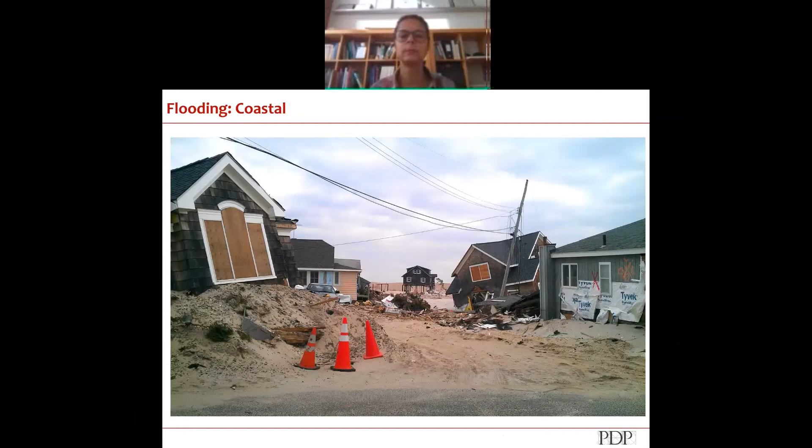There's also the possibility of what's called ice jams, which is when ice will block, for example, underneath a bridge opening, and then it would back up the water behind it. That's referred to as an ice jam. Riverine flooding is when a river floods. This is actually near my office. And if you look at the deck, this was August.

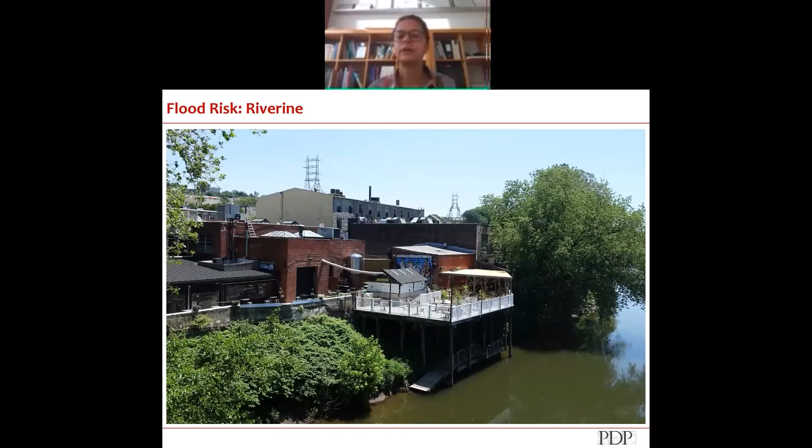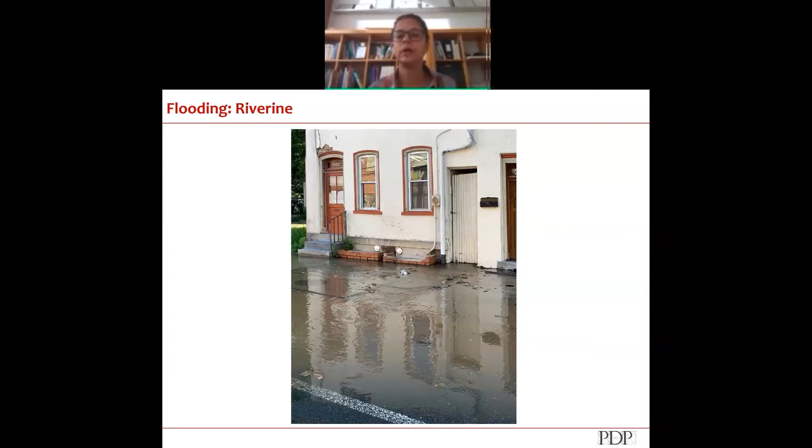So riverine flooding is when the river water rises and impacts historic buildings. You can also just get rain on a body of water, such as a lake, and the lake rises, affecting the properties around it. So the National Flood Insurance Program, which was founded in 1968, makes flood insurance available to both residential and commercial property owners. And it's insurance for both the property itself as well as its contents.

So if a property is in a higher risk area, the cost of that flood insurance is going to be higher than if it's in a lower risk zone. One of the things about the National Flood Insurance Program, which makes it a topic of discussion for a lot of people, is if you are purchasing a home with an federally backed mortgage, you are required to have flood insurance.

So the cost of that flood insurance is something that people have to add into their effective cost of owning a home. So people are incentivized to reduce that cost, obviously, as an expenditure. And the National Flood Insurance Program, which offers the flood insurance, wants to minimize its risk so that it's not paying out money.

And part of that is because by act of Congress, the National Flood Insurance Program must be financially self-sustaining. So what that means is they are supposed to be taking in as much money in premiums as they are paying out. So one of the essential problems with that is if you look back to events like Katrina and Harvey and Sandy and keep naming all of these storms, the National Flood Insurance Program is paying out a lot more money than it has been getting in historically. So they are currently raising their rates dramatically, which is having a big impact on homeowners.

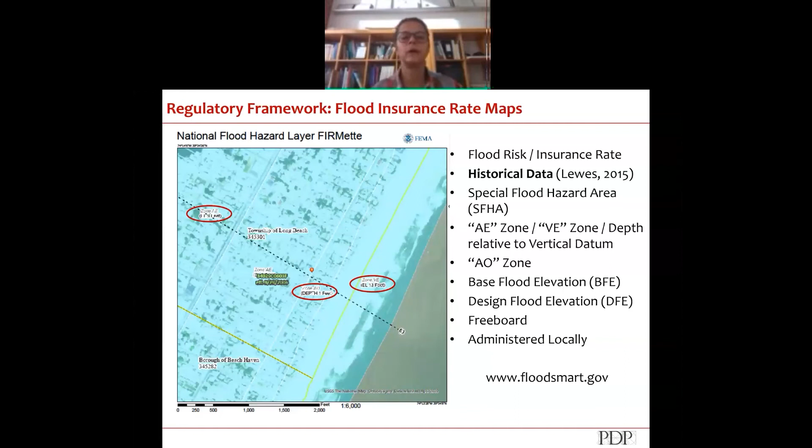So why does it matter? People's flood insurance rates are going up so that the National Flood Insurance Program can be self-sustainable. So individual property owners are looking at their rates go up and making choices about how to change their properties to try and reduce those rates.

For historic properties, or people who are concerned about historic preservation, it also matters because there are going to be changes to some of the buildings and places we care about. So one of the ways that you can quickly check your particular property's vulnerability is, I just noticed this, I think this went live November 1st.

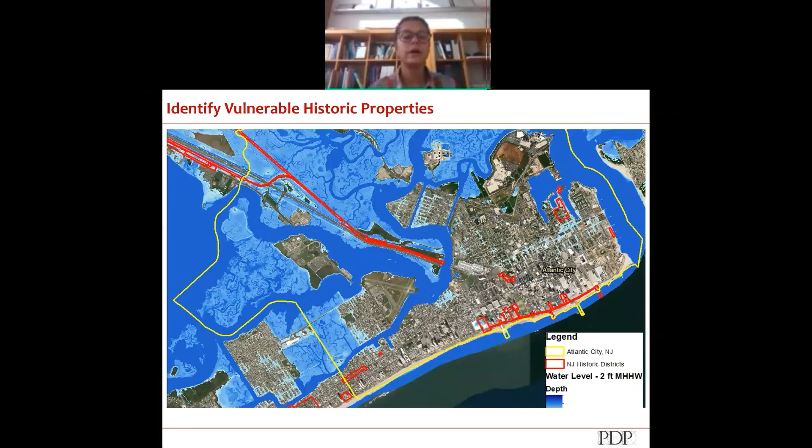If your community doesn't have it and you want to investigate on your own, New Jersey Flood Mapper is a fantastic tool that actually allows you to look at all areas of the state in New Jersey and map it for potential flood risk. You can also include sea level rise, so what the anticipated increased height of the sea will be and the impact on the landmass. So this example actually has 2 feet of sea level rise.

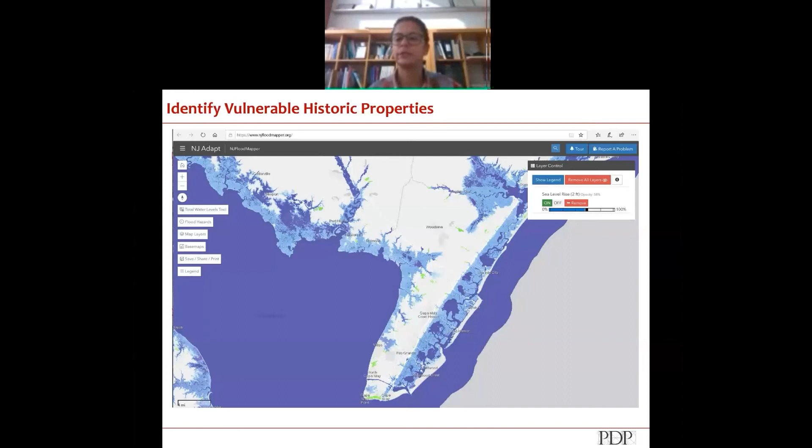And I picked 2 feet because there's a 17% likelihood that by 2050, the sea level in New Jersey will rise by 2 feet. It is 50% by 2070. So that's 50 years away. And you can also drill down into individual properties and use the same information. This is an example from Cape May.

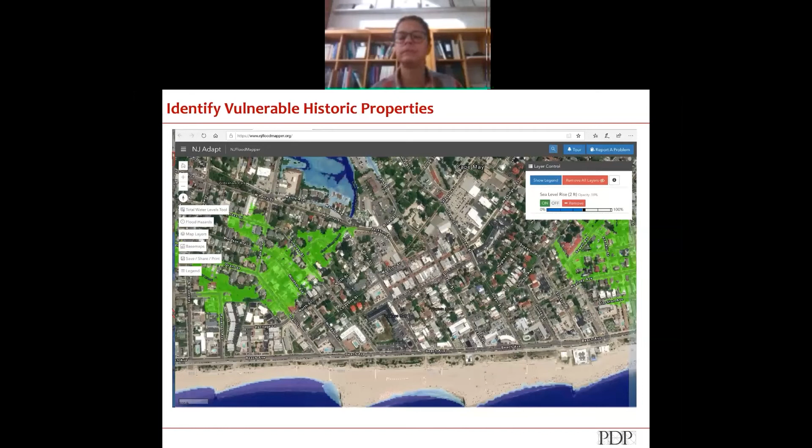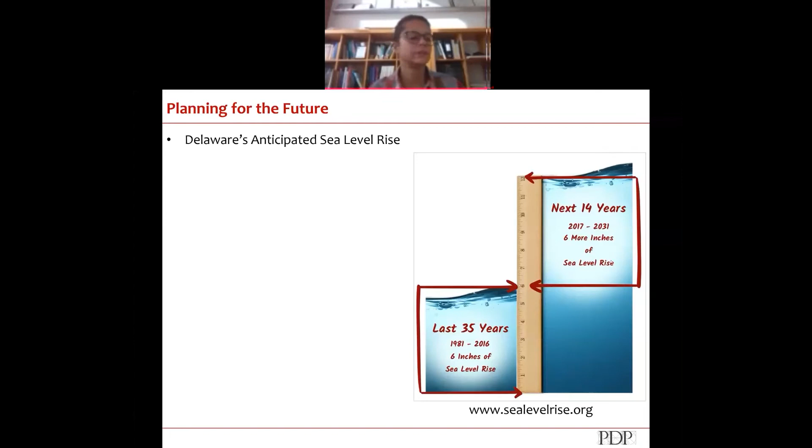So how do you know your own flood risk? Obviously, the property at the top of the hill has less flood risk than the property at the bottom of the hill. There are lots of ways to mitigate the flood risk of all of the properties, but we have to figure out which is the one that is historically most acceptable to us.

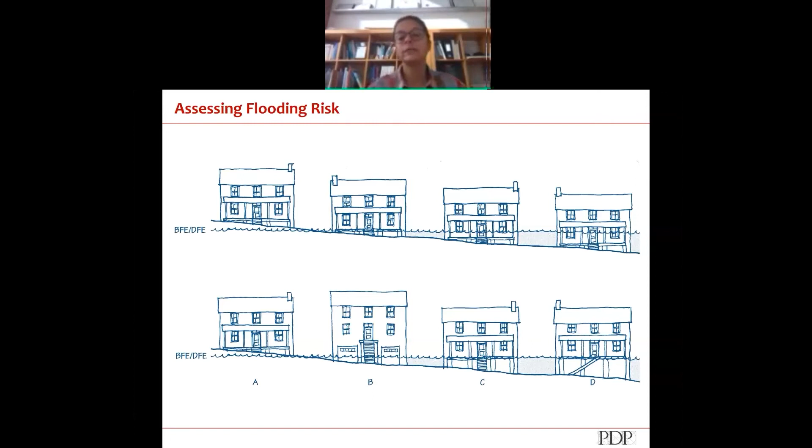So option B, which includes raising the house very high and including garages at the first floor and eliminating porches, is probably going to be the least acceptable option for preservationists. But whereas option C might be okay, option D, where you're really starting to get higher than you would like, but understanding that's where the threat is, is it still okay? That's something to think about.

So in looking at residential mitigation options, there are a few different kinds of things you can do. I'm going to focus on some of the basic things that every property owner can do, and then we'll get into some of the more complicated things which take architectural engineering services to make them happen.

So one of the basic things everyone can do is some improvements to their own landscape. And the central goal of landscape improvements is really retaining all the water that falls on your site. So think about having zero runoff to anywhere else. So everything that falls on your roof, on your driveways, parking areas, walkways, etc., all gets permeated back on your own site. This actually sounds a lot like LEED design, energy efficient, green design processes.

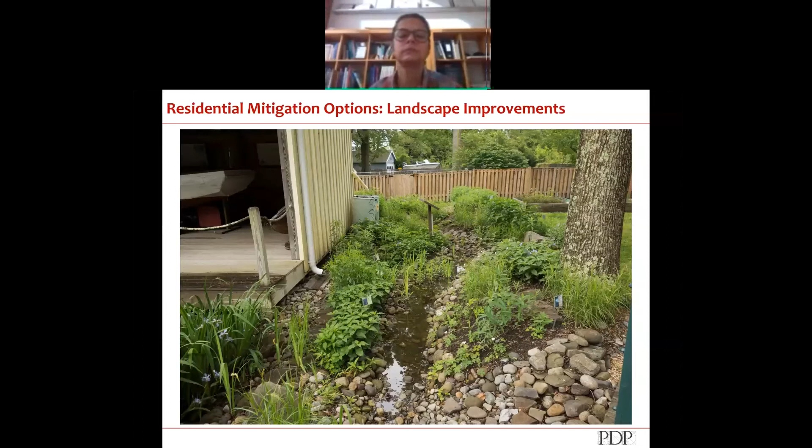So things like rain gardens, where you have native plants absorbing water that's coming off the road, as well as anything that's sheeting off the grass. This example has a downspout coming off a roof that's supplying water to a rain garden, again planted with native plants. You can also collect it in a vessel known as a rain barrel and use it to water your own landscape. And they can be beautiful. They don't have to be horrible.

Another option is looking at permeable surfaces, so walkways with soil in between, which allow stormwater to percolate down into the soil, and gravel paved parking areas. Other examples.

You should also use native plants and big trees. Big trees actually drive water down deep into the soil, and native plants are beneficial in that they can tolerate the local conditions, requiring less water as well as less pesticides.

So when considering doing mitigation options to buildings, so getting away from the landscape, one of the things to keep in mind is a building that is in poor condition is a bad candidate for any flood mitigation project. So basic maintenance is actually a key part of mitigating historic buildings.

Some of the things that we can do can also just happen as you're doing the work. So if you're going to be replacing your boiler that's in your basement, if that's a vulnerable area, then that boiler can actually be put up on a higher floor and taken out of harm's way. Having major equipment in a house that fails as a result of a flood is extraordinarily costly to fix. At the same time, you're trying to fix a lot of other things in the building that need your attention.

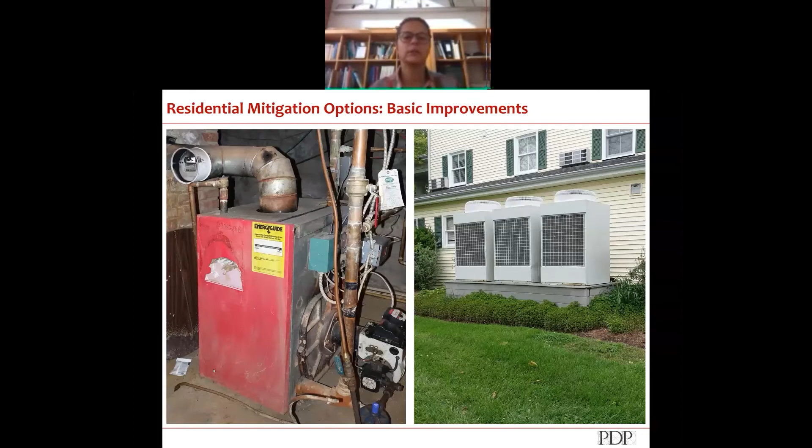In addition, certain building systems will help in the recovery from a flood if they are maintained and continue to work. Electrical service is one. Being able to blow air, whether through an air conditioning or air handling system, or even just plugging in a fan, is helpful, as is having good clean water for cleanup purposes.

So in this example, this building was flooded out. So what they are doing is they're literally moving all the electrical and plumbing utilities further up on the wall before they sheetrock it in anticipation of the next potential flood.

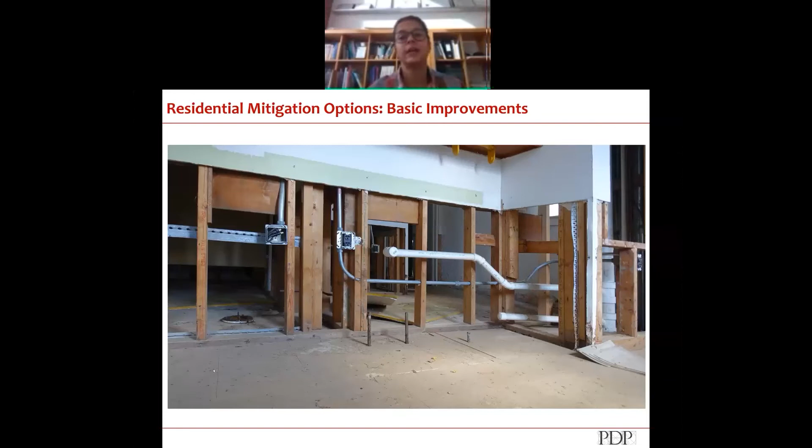We also have to think about what recovery options mean. So local historic districts have been reluctant to accept solar panels. Solar panels can provide electricity again to blow a fan after a flood event occurs, or even maintain food in a refrigerator. So having a solar panel available doesn't make a homeowner dependent on whether or not the local municipality can get electricity up and running after a flood event.

We also have to think about how we deal with our buildings and recover from flooding as quickly as possible. One way is to put a sump pump in. So this is usually in a basement, collects water and pumps water out. So adding a sump pump into a basement can be helpful in terms of recovery.

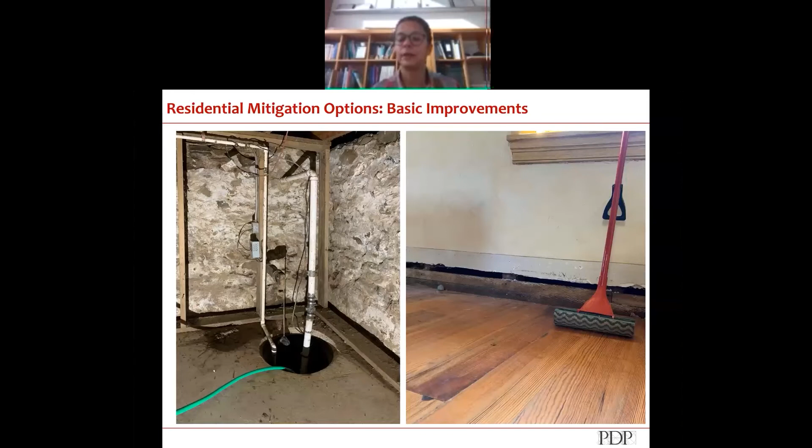So when they go to put the baseboard back in on this building, one of the things you're talking about is, can they put it in a way that allows them to take it off quickly, to allow that drying process to begin faster the next time. So principally, this talk is going to really focus on building elevations. And hopefully, I'll provide you with some tips for doing better examples than this one.

Ideally, building elevation should focus on providing resilience and safety to the property owners without greatly altering the historic character of the building, but also the surrounding district. We always think in context in preservation. So what is building elevation?

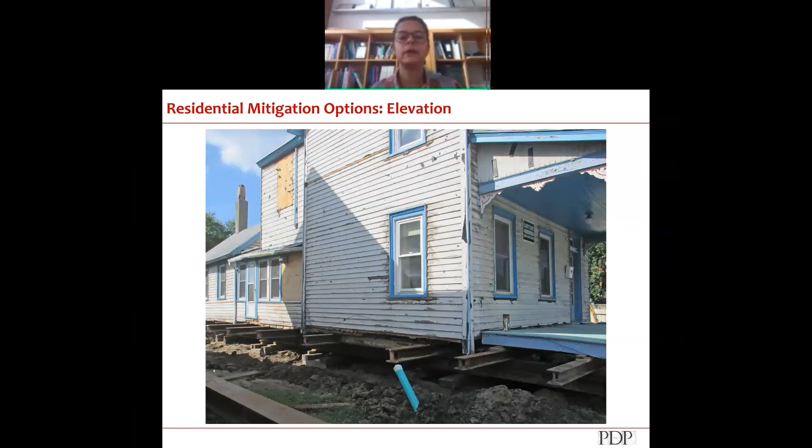So to do a building elevation, structural beams are put in under a house, a building. It is disconnected from its foundation. All of the piping, wiring, everything that is feeding from your basement up is disconnected. And the house is then raised up slowly to a desired height. Once it is in position, foundations are built. The house is supported on those foundations. All of the building systems are then reconnected. And then the house sits on this raised elevation.

So for a property owner, there's a lot of expense in going through all of those steps. And yes, they can be paid for or partially paid for by someone like FEMA, but in any case, it's a lot of money, and it's a trying process, to say the least. There is very little difference from the perspective of a property owner to raise a house 4 feet versus 8 feet. The cost is essentially a few additional concrete blocks.

However, if I'm a property owner, if I can raise it 8 feet and get a garage under my house, particularly in an area that may be difficult to park, like a shore town, then that could be a great advantage. So property owners generally want to go as high as they can possibly go to allow them to benefit from the space that is found space under their house. The problem with that is that in a historic context, as in the illustration I showed earlier, it's often jarring and removes important historical features like front porches.

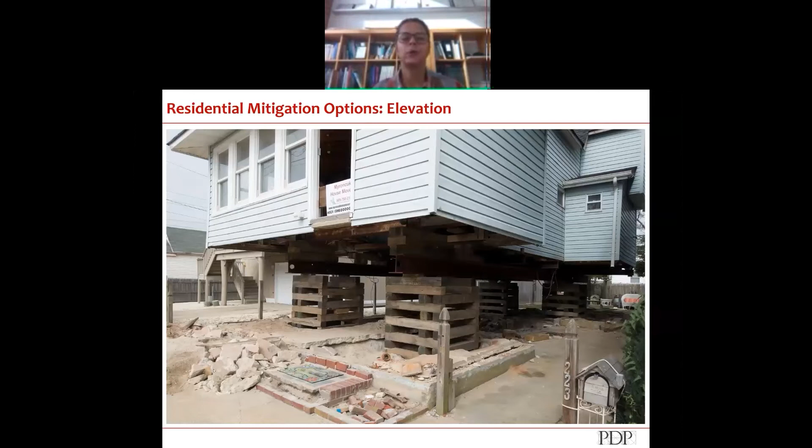I don't know where the base flood elevation line is or the design flood elevation for this particular residence, but the higher buildings get and removed from the ground with no context or no attachment to the ground, they start to look like they're floating in air. And I'm sure this will be finished beautifully, and I didn't see it finished, but I think it illustrates the point well.

So what are the options? For zone A, and zone A are those inland areas where the water is basically rising like a bathtub and we don't have waves coming in, you can either put the house up on fill, so basically increase the height of the soil and then set the house on top of that, as the first example. You can have a perimeter wall or crawl space with what's called flood openings or flood vents on the side, which allow the water to go in and out to equalize the pressure on both sides of the wall.

If you have a basement, you generally have to abandon the basement. And to abandon the basement properly, you actually need to fill it in. And the reason you need to fill it in is because the pressure of those walls with water on the outside can actually collapse the walls. So fill in the basement. What do you fill it with? Something like gravel. Install flood vents, again, equalizing the pressure on both sides, and raise the lowest floor above the base flood elevation.

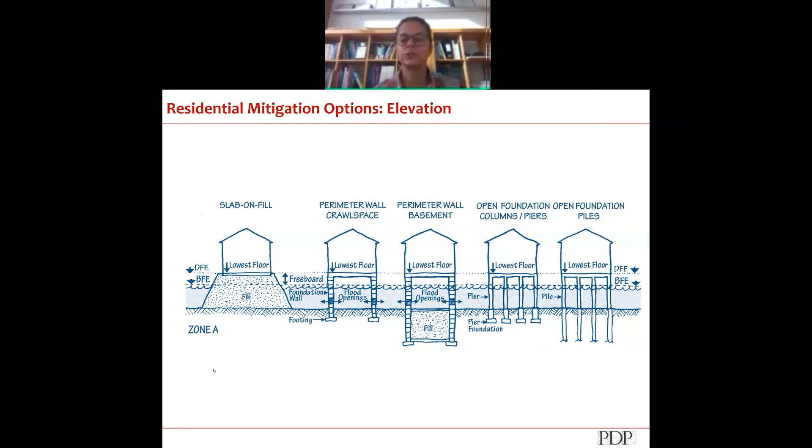The other option is to have it on piers or piles, which is open, which really lets the water flow through. Now you can on piers and piles also put lattice and foundation screening to make it look more connected to the ground, and we'll see some examples of that.

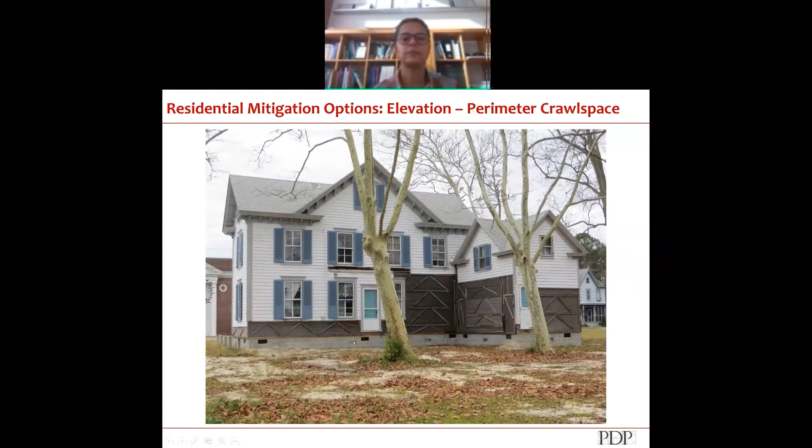So in this example, this house was raised. If you look carefully, there are these little openings along the edge, not these, which were where the building was physically picked up. But these are flood openings which allow the water to go in and out around the perimeter of the foundation. This is what a flood opening looks like. They have to occur on at least two sides of the building, preferably opposite sides, and it allows water to come in and out, equalizing the pressure on both sides of the wall.

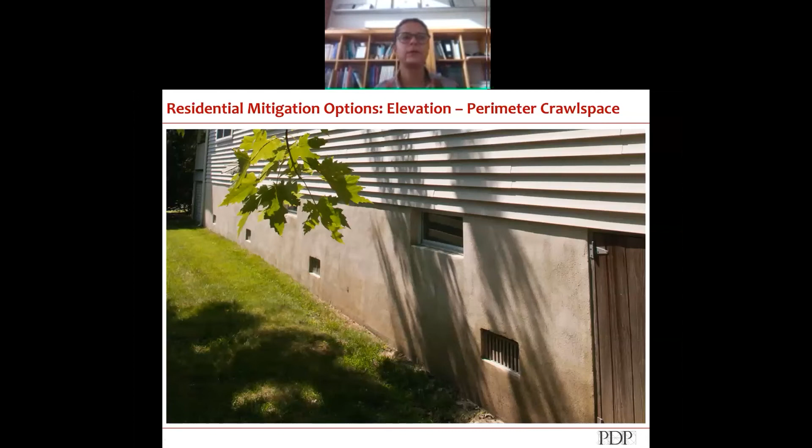So when you're looking at residential mitigation options for elevation, one of the most challenging things to consider is the size of the lot. So the smaller the lot is, and particularly the shorter the distance between the sidewalk or the street edge and the front door, it makes it a lot harder to elevate taller. And let me explain why.

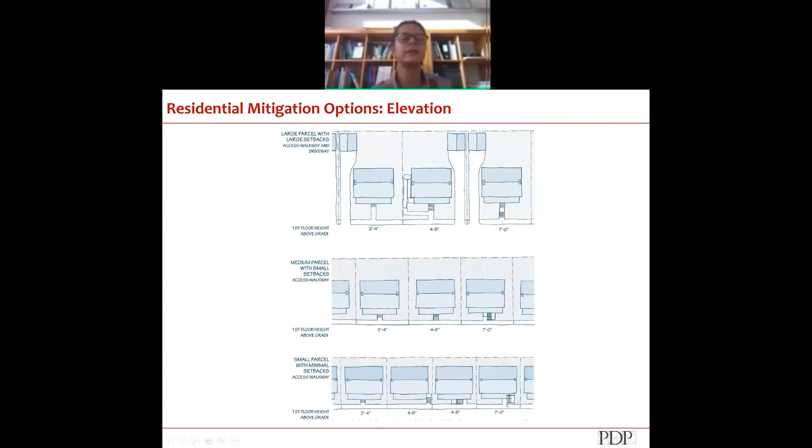So for the purposes of the New Jersey guide, what we looked at was a bunch of case studies of different types of houses and elevated them. And one of the serious considerations was how tall do the stairs need to be? So if we are raising a house about 2'4" above adjacent grade, there are a couple examples of stairs. Pretty straightforward, pretty simple.

By the time we get to 4'8" above adjacent grade, the stairs get a lot more elongated, and in some places we started to look at turning stairs and things like that. If you have to elevate 7 feet above grade, and keep in mind that's not even the height needed for a garage, it gets a lot harder to configure that many stairs. So stairs take up a lot of space. That's the message I'm giving you.

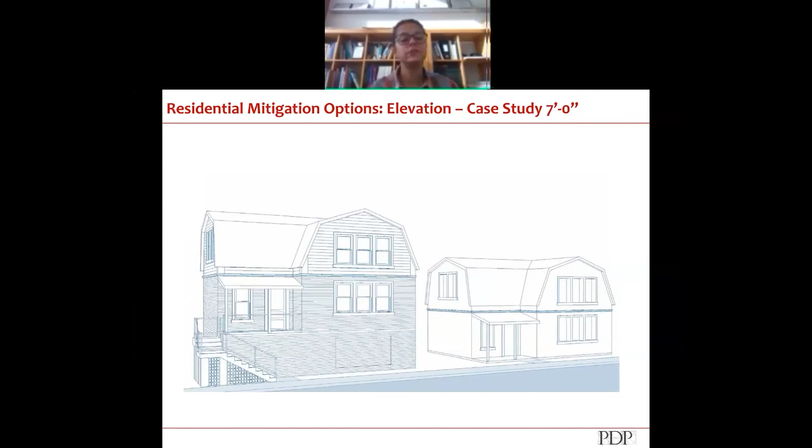And yes, 7 feet is a lot. 7 feet is hard to mitigate. But in looking at different styles and types of buildings, I think you can see that you can do certain things, not only again in the stair, but also doing things like introducing blind openings so that it appears as if the building may have been built that way originally or close to it.

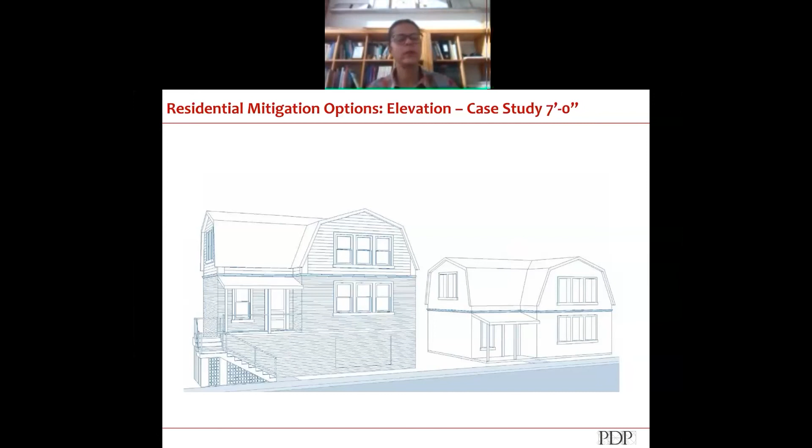In all of these examples, we have really simplified things like railings and we're not showing any landscaping or other mitigation, just to allow you to focus on just the building elevation itself. But the hope would be that all of the buildings in the historic district would have a similarly established height, to which the local historic district commission would say, we want our buildings in our district to be 1 foot above the base flood elevation or 3 feet above the base flood elevation, and not let each house have a different answer for each property owner.

We dared to look at mid-century modern, which is very hard because slab on grade is actually one of the hardest, and 1 story is harder to elevate than some more traditional buildings. And the other thing to consider is if in elevating a building, people want to do things like add garages or add bonus space underneath, they do it where it's least visible to the public way.

So it's not that it's impossible to have a garage or make better use of some of the space under a building, but you don't necessarily want it to be the dominant feature on a streetscape, and you don't want to eliminate important architectural features such as porches from the fronts of buildings.

And as Kate mentioned, you also have to consider new construction. So new construction has to be built to meet all current flood requirements. So flood requirements today say that any use that is within that flood zone of that base flood or design flood elevation, uses that are allowable in that zone are parking, storage, and entrances.

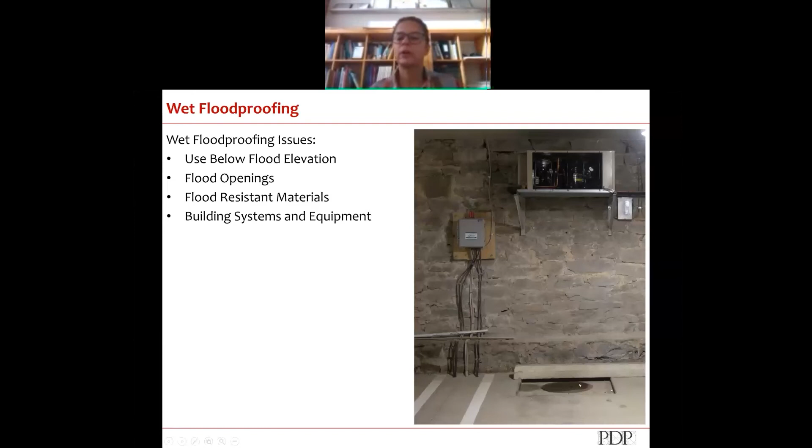So this is an example of residential floodproofing in Philadelphia. Not exactly architecturally inspiring from my point of view, but it meets the criteria. So first floors are here, storage there. Around the back of this building is an alley, and there's parking. Oh, sorry about that. There's parking at that grade level. So there's parking at about this level behind, and then this gets you down to the sidewalk.

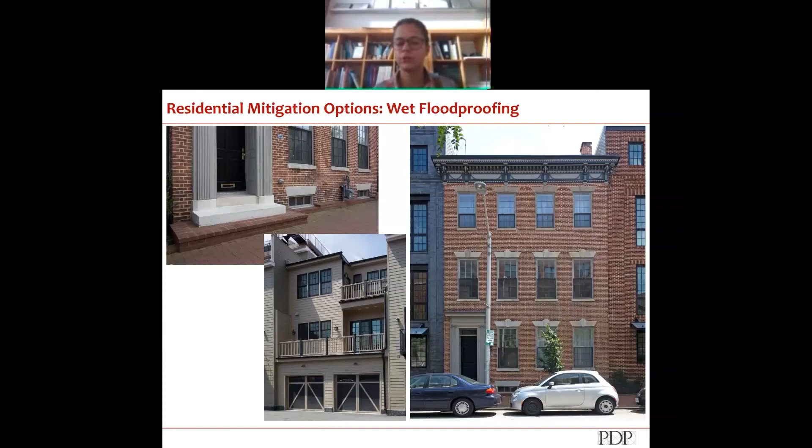So what is dry floodproofing? Dry floodproofing is essentially wrapping the building in a wetsuit in all of its areas where it's vulnerable to being flooded. So in terms of a wetsuit, what you're doing is you're trying to keep every drop of water out. It's an enormous task. Requires incredible engineering to make it happen. So if you think about all of the cracks and penetrations in a building, you are trying to keep every drop of water out.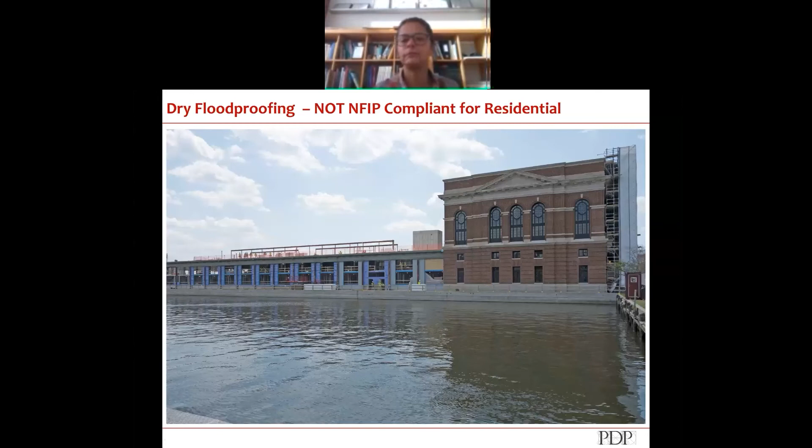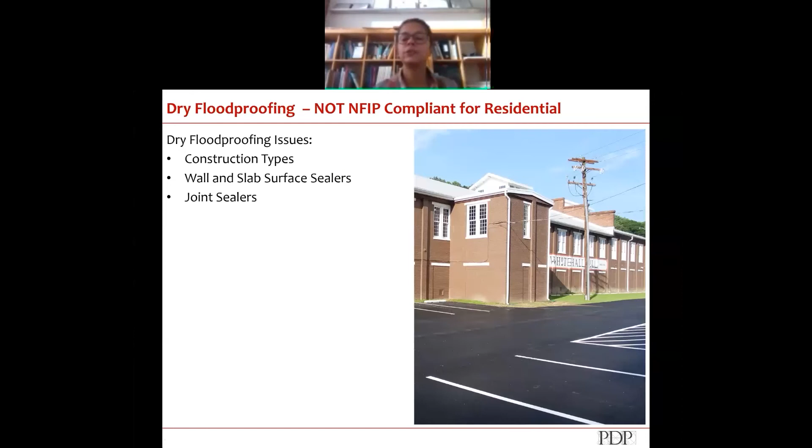So construction types, again, only masonry and concrete buildings. You have to use a lot of things like wall and slab sealers. That means that the walls themselves have to be as waterproof as possible, as well as the floor slab in the lowest floor level. And you're using joint sealers, you're filling in every possible hole.

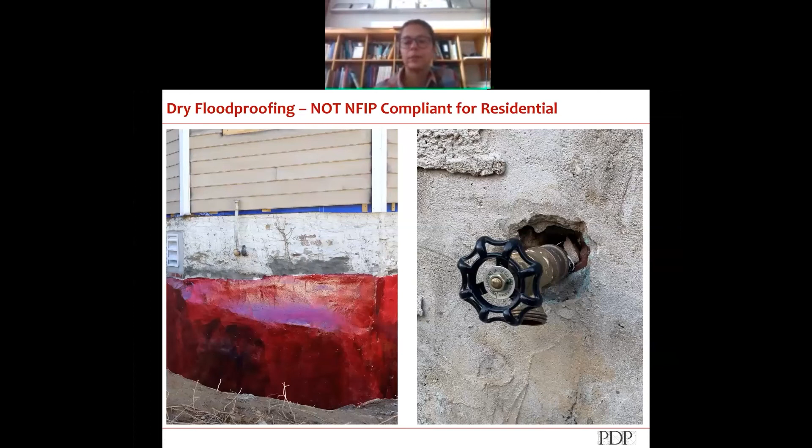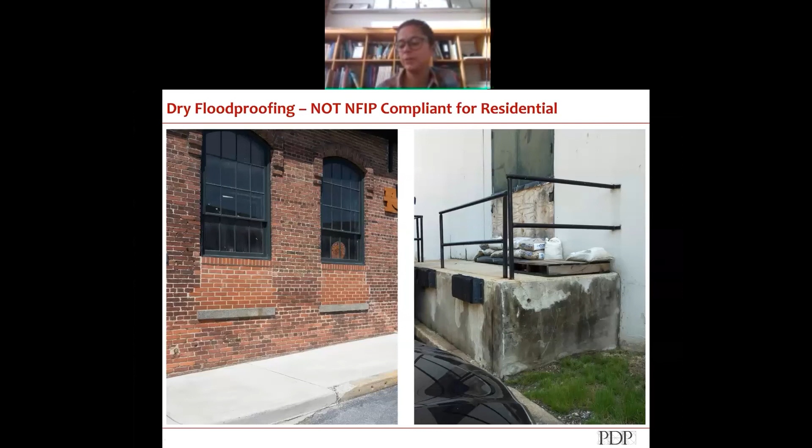Floodproofing also includes doing the sandbags at the door. It's a very temporary floodproofing method. In this example, it actually became a semi-permanent version, but it should be temporary. And another option is to actually install flood barriers at things like doors and window openings.

So another option for historic buildings is relocation. Similar to elevating a building, relocation includes picking a building up off its foundation after you've disconnected all the building systems, et cetera, and then preparing a new site, moving that building to the new site, and lowering it down and reconnecting everything. So the National Park Service has a lot of information about relocation, when it's appropriate, when it's not appropriate, et cetera. That should be used as the general guide.